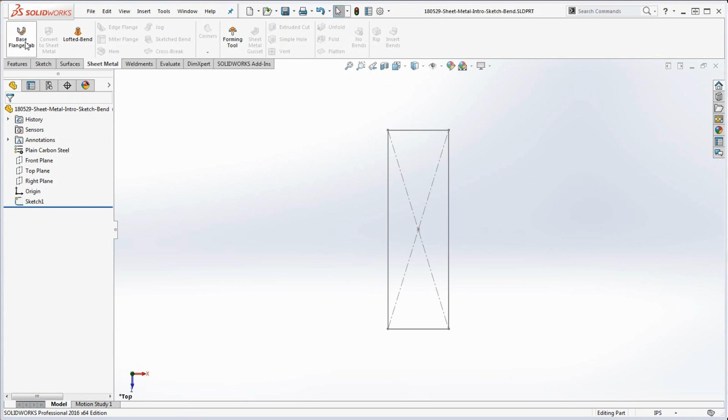It's going to ask us for a sketch, so we'll click on the sketch we have. You'll notice it's giving us a thickness and showing the direction of that. One thing you'll notice here - it's not going to allow us to do a mid-plane extrude.

It's going to allow us to pick one side of the sketch or the other to put that in place. So I chose a value of 0.05 inches, a little thicker than it needs to be, and that provides a nice preview of what we're going to get. If you want to reverse direction, we could do that - it'll go on top of the sketch, or back to the default setting, it'll go to the bottom of the sketch. Either one would work fine.

So the K-factor, real quick - K-factor defines how the metal is going to be bent. Typically there's a neutral plane in the middle which doesn't get bent, but the inside surface, when it gets bent, is going to be in compression. The outside surface is going to be in tension - it's actually going to be pulling apart. So K-factor, depending on the material you choose, is typically in the middle, but there might be variations to that. We're not going to get into details on that.

But just so you know, these are some of the parameters we're setting up from the very beginning - it's going to be embedded into our sheet metal part. In auto relief, if we were to bend only a portion of this, where some of it's flat and some of it's bent, we're going to have to make a cut in there.

So that's what auto relief is, and it could be rectangular. We could just do a plain old tear or obround. Obround kind of puts a circular end in that, but we're not going to go into that sort of detail - these are some of the choices you can make. We're going to use a ratio of 0.5 and keep all the default settings.

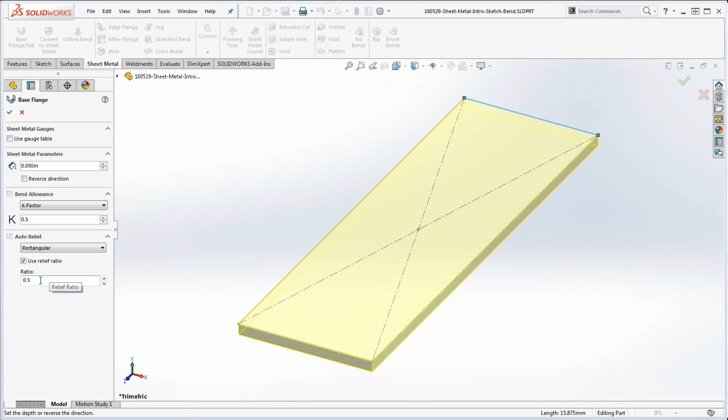Once we do that, we go to the green check mark, and it does an Extruded Boss base. But you'll notice up here it also gives you a sheet metal folder with the sheet metal parameters in it. If we right-click and add, or right-click in the folder, it does the same thing. Now we have the capacity to define our sheet metal again.

So we have the K-factor in here. We're not going to override anything. We have our auto relief, which is rectangular, again with the default settings. We're not going to pick anything fixed face for an edge. But just to let you know, we can override some of these factors if we go into that sheet metal feature.

And if we right-click up here at the very top of the folder, now we have the capacity to actually change some of these settings. We're not going to change any of these - we'll save that for future videos. But what we have here is that feature, kind of like an Extruded Boss base.

So now we're going to put in our sketch bend.

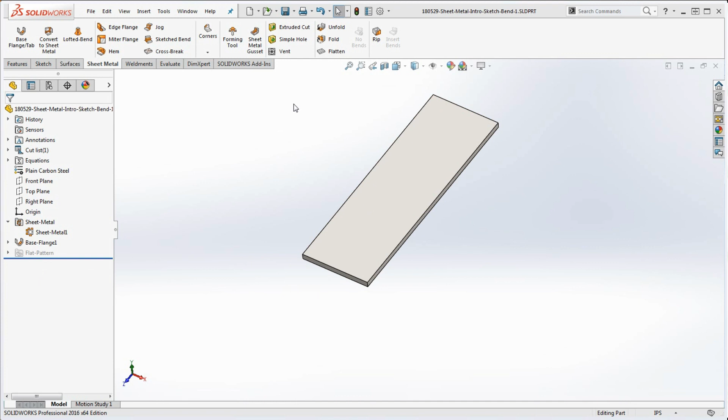Alright, so let's put in our sketch bend. Before we start this, we're going to go ahead and highlight the sketch that defines this feature, so we might be able to do some dimensioning off that base sketch. So we're going to go ahead and show that sketch, which is part of our base feature.

You can see where that sketch is oriented - it's on the top surface of our part, and we extruded that down. So let's go ahead and put another sketch line in here. We're going to call that our sketch bend.

We can do that a couple different ways. We can go up here to sketch bend and click on that, and it's asking kind of like what it does if we didn't initiate a sketch first before we did a feature. We're going to go ahead and choose a face to sketch on. We're just going to choose an arbitrary line - it has to be a model line to do that.

Then we go ahead and go to the green check mark again, keeping all of the default settings, and now we have that line in place.

While that's still active, we can go back to sheet metal and go back to sketch bend. Now you can see what it's going to do. So for bend parameters, it's going to ask us on which side we want to have the fixed face.

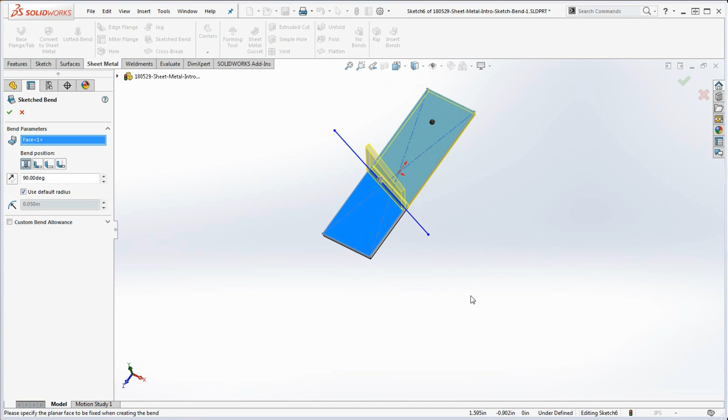If we go ahead and choose this side over here, it's going to bend this part. If we choose this side, it's going to bend that part. We're going to go ahead and choose this part over here, and bend that portion down here. Now you can see what that looks like - if we turn that sideways, you see a preview of what that's going to do.

A couple different things in here: it's going to right on that line. With the options we've set, it's going to bend right at the center line, but we can choose other things too, where everything's going to be on the outside.

If you rest your cursor on that, the material is going to be inside. That's going to be the material on the inside, that's going to be the material in the middle, and this is going to be where the bend is on the outside - material on the outside, sorry, material is going to be outside, but this one is going to be bend on the outside. So you can see the different selections you can have here.

So our bend radius, remember, is going to be 0.05, and that's going to be this radius here. It's always going to be on the inside. The radius on the outside is going to grow from that, but the radii in here are going to be concentric with each other.

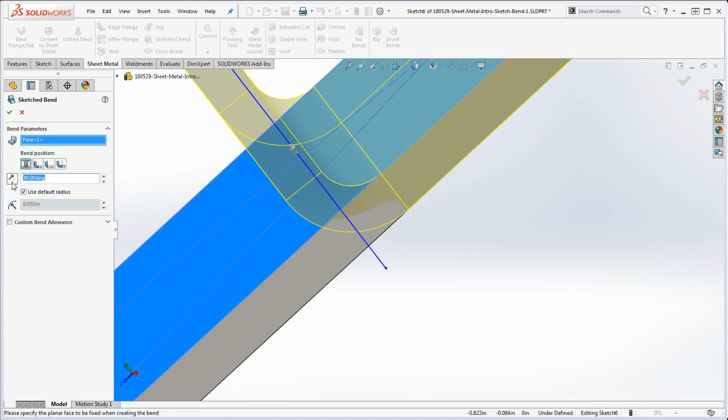So this radius out here is going to be that radius in here plus a thickness of the material, which should be like 0.1, I think it ultimately adds up to. So the bend degrees in here, we can make that like maybe 30 degrees rather than 90 degrees. 90 degrees kind of shows that a little bit better.

Kind of shows you what that's going to look like. And again, we can go ahead and show what that's going to look like depending on the different kind of bends that we choose up here.

So once we go to do that, if we go to the green check mark, bing, now we have that in place. So one nice thing about this is we can go up here to our sheet metal portion, our sheet metal tab in the command manager, and go to the flatten. And what that does is it flattens our part.

Now you can see that we have a line in here which defines where that bend's going to be. So that's going to translate to a drawing. So quite typically you can take a 2D drawing and clamp down your piece in here on that 2D drawing and put your clamps right there on that line and make the bend and bend that part of it while you have this portion of it clamped down.

So that's a flat pattern. What that does is just suppresses and unsuppresses this feature down here. So suppress, unsuppress does the same thing. Flatten, unflatten does the same thing up here.

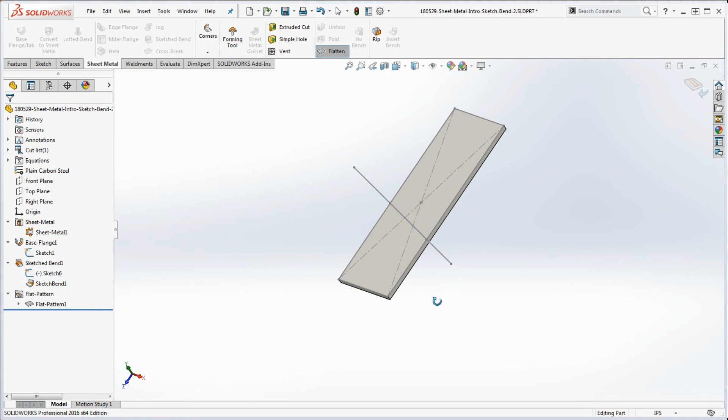Alrighty, so let's do more. So if we go to our sketch bend, let's actually take a look at this and show you where that sketch bend line is. Since we chose a mid option in here, you see that that line is right on top of that center line. And this line defines our sketch bend is right on top of that center line in here.

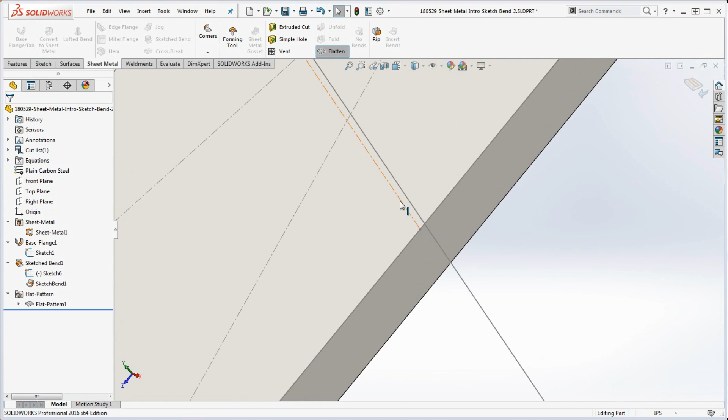But if we were to take that sketch bend and modify that a little bit, instead of it being right in the middle, let's go ahead and do some extreme. Let's do the bend on the outside and see what that does. Now you can see that that bend line is moved a little bit. So depending on where that bend line is, depends on how your model actually gets bent, how your part gets bent.

So with that said, let's go ahead and define that line a little bit. So we're going to go to our sketch 6. The line is underdefined. So let's go ahead and do something with that. Let's go ahead and take that line. We're going to make that horizontal. Maybe pull that down a little bit.

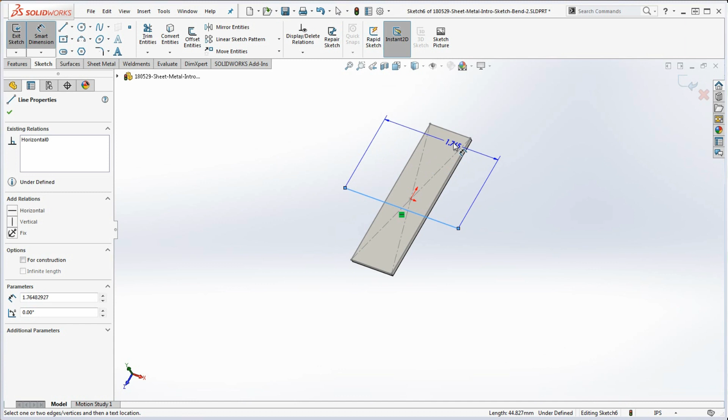And then we're going to put a dimension between this line and maybe the edge up here. We can make that like maybe 1 1/4 inch, perhaps. Kind of puts it down there. Let's go and rebuild and see what that does. And if we go ahead and flatten and unflatten that, still works, as we would anticipate.

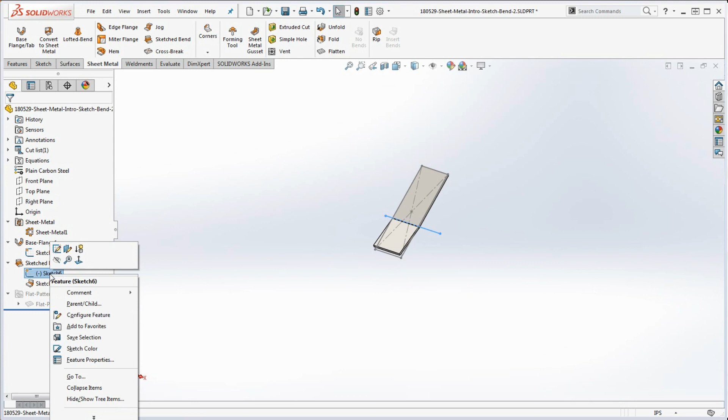So you can see that we don't necessarily have to have that line fully defined in order for this to work. But it's always good, I don't like seeing negative signs in my feature manager when it comes to sketches. So you could conceivably bring that in. But let's do something just a little bit drastic.

Let's bring in both endpoints of that line and see if it actually works there too. So the line is just there as kind of a marker, kind of as a reference. Doesn't necessarily have to be fully defined, kind of like a rib feature.

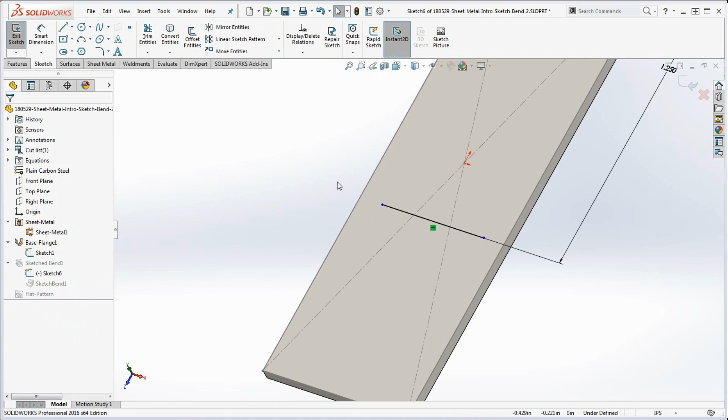But again, if you want to do that, if you want to pull that line into the very edge, you could do that too. So we can go ahead and click on that point and that edge. We can make that coincident. And this point and that edge, we can make that coincident too, and go ahead and rebuild that.

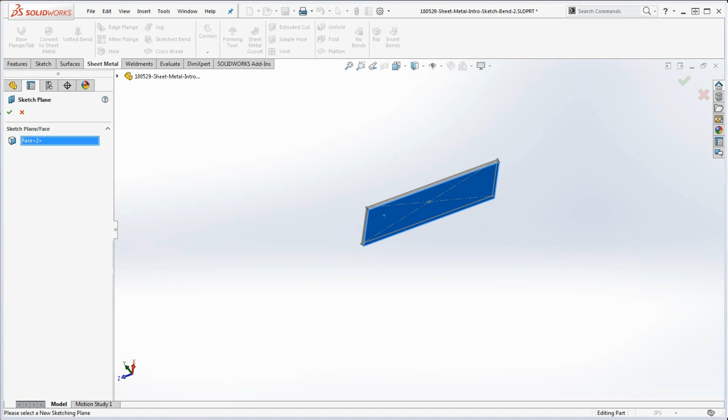Let's choose something a little bit more drastic. Let's go ahead and right-click in that sketch, go to Edit Sketch Plane, and let's do this. Let's take it and put it on the bottom rather than the top and see what happens. So now it kind of does that. So now we have our fixed portion up here.

If we were to right-click in that and select the face, it's going to be fixed. Now it would change that. So we originally had it back here, so we're going to have it over here. But we can put it back here if we want to do that. And put that fixed face back here, and then go to the green check mark and see what that does. But if you look at that, what it really does, it actually puts it down here.

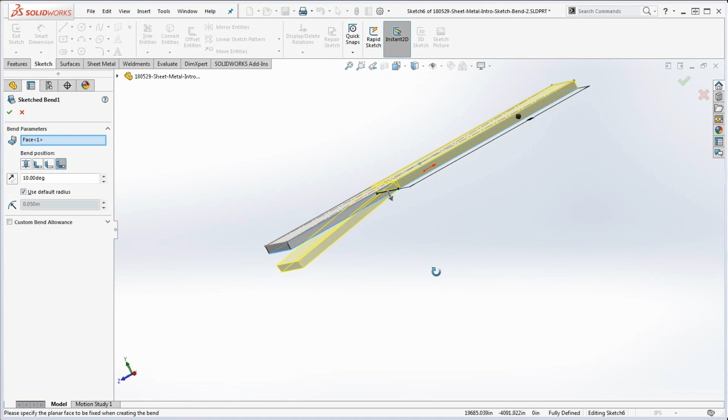Our fixed face is going to be on the face where that line's going to be, which defines that bend. So if we put it on the bottom of the model, we have to put that fixed face over here or over here for that to work. We cannot choose this surface up here for it to bend on the bottom—that's not going to work. If we did that initially, it won't allow us to, so it kind of makes that correction for us.

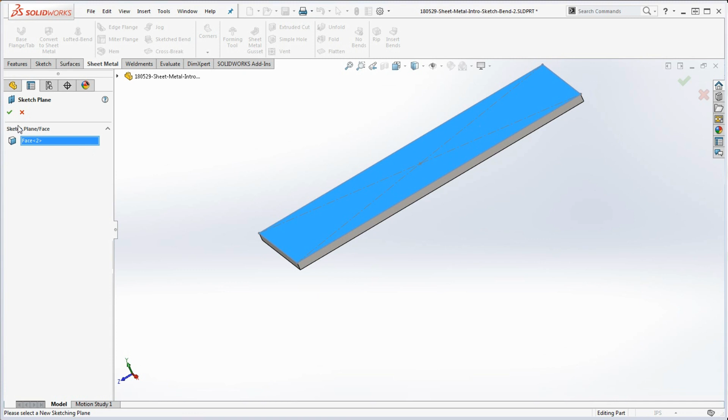Let's go ahead and do this. Let's go back to our sketch 6, select what we had before, and select that face for it. Then we're going to go back to the original design that we had.

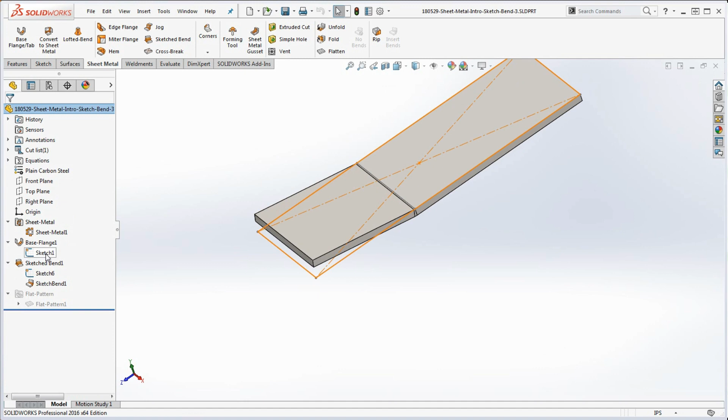Okay, let's do a little bit more. We're going to put a point in this. This original part, the way it looked, had a point on the very end of it, so we're going to do that. We'll go back to our base feature, where our base flange is, and edit that sketch. Let's move it around a little so we can see it better, and make it normal to the screen so it's easier.

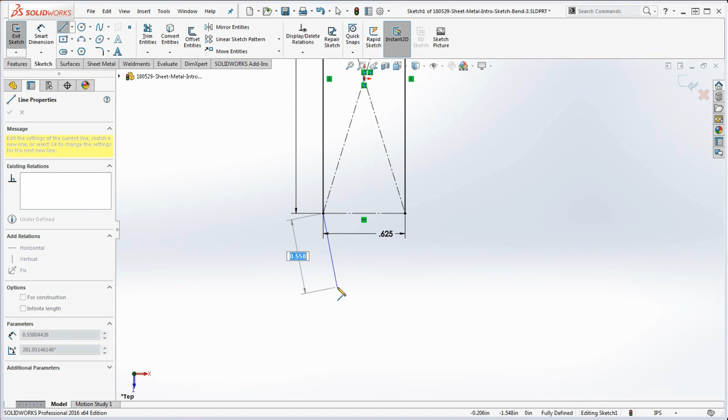In order to maintain our existing sketch geometry, we're going to take this line in here and turn it into a center line, into construction geometry. Now we're going to put in some lines down here. It's got a point down here, and the point's going to be symmetrical, but we're going to exaggerate that a little bit. There are a couple of different ways we could do this to make sure that point is vertical to this point, or the origin—the point at the center of the rectangle. We could do that too.

We can actually click on this point and that point and make that vertical, and that'll work. Let's just try that. If we click on these two, we can make that vertical. And if we try to move that point around, it's not going to let us do that—or actually, it will let us do that. But let me show you a different way.

Let's get rid of that vertical sketch relation and try something different. We're going to take these two lines in here and make those equal to each other. Now watch—remember the functionality we had before when we made that vertical? We were able to take that point and move it around. Can't do that this way. So that's kind of weird. I don't know, it worked one way, but it won't work the other.

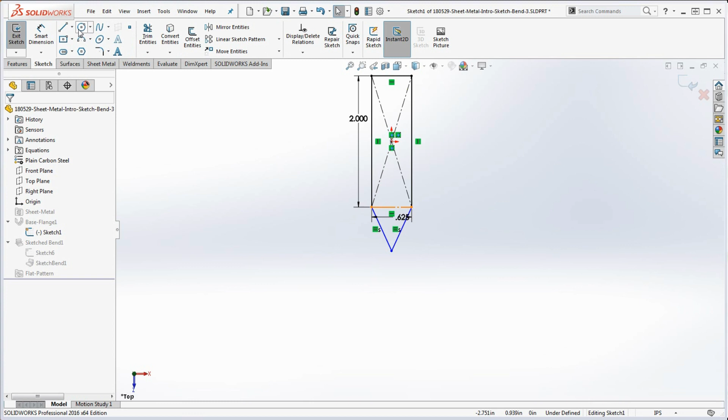We know it's not fully defined. But if we were to take a center line as a way to get around that—not like it's a real big deal here because we're going to define that in a different way—if we put that in there, now we can stretch it like we did before. So kind of strange, but I think that's probably close to what the shape was.

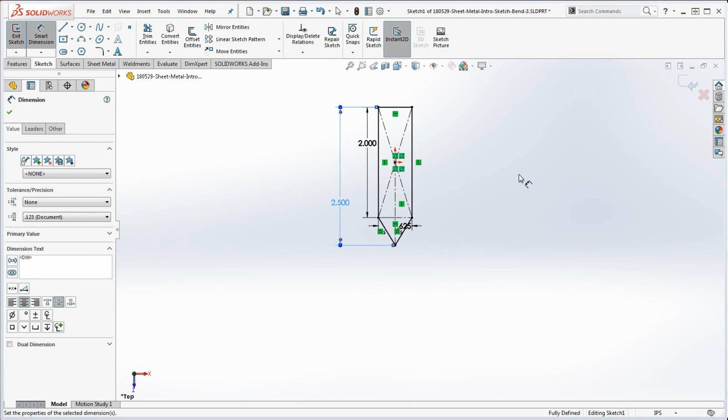Let's go ahead and put a smart dimension between this line and that point. It's really close to 2.5, so we're going to make that 2.5. If we rebuild that, now we have our bend.

If we go back and go to our sketched bend, right click on that, go to the options in here. Right now we have both the bend and the material on the outside—the bend's on the outside. This one's going to be the material on the outside, it kind of moves a little bit. And of course that's going to be the bend and the material on the inside. Then we're going to put it right there in the middle.

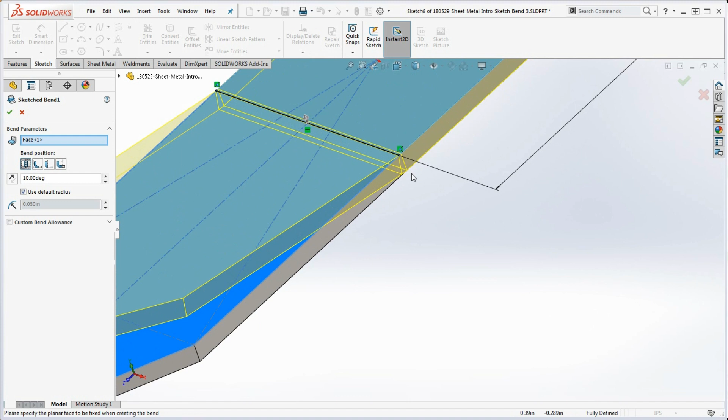So slight changes in there as we go through, but that's one way you can take a flat sheet metal type part that's got a certain form to it and put a bend in it relatively quickly, while also doing that design for manufacturing. In the end, you get a flat pattern with a cut-out piece of metal where the bend line is going to be, and if you clamp it down at that bend line with the appropriate bend radius, you get a part that can actually be manufactured using sheet metal methods.